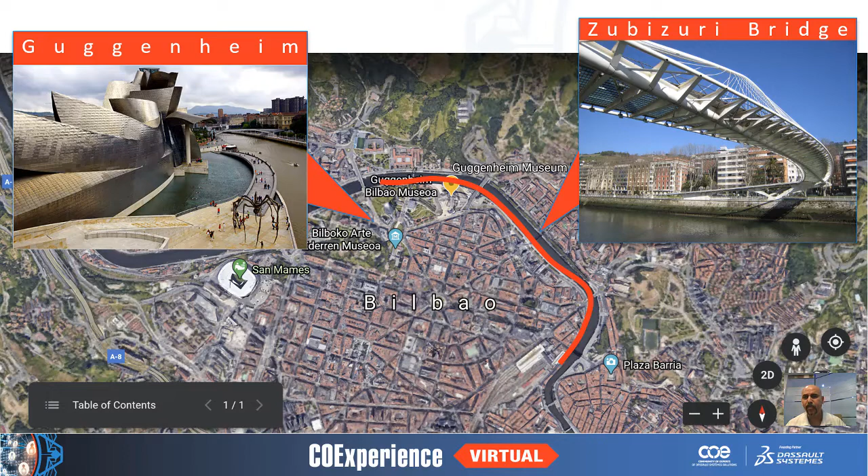This is our story. In 2000, I went on an architectural pilgrimage. Top of my list was to go see the Guggenheim in Bilbao, which was developed by Frank Gehry and it happened to be created on the CATIA V4 platform. When me and my friends got to Bilbao and exited the train, we were right next to the riverfront. So intuitively, we began to walk on the river, and along the way, we came across a pedestrian bridge, the Zubizuri Bridge. To put the story of collaboration in perspective, I would like to take you on a journey of the project.

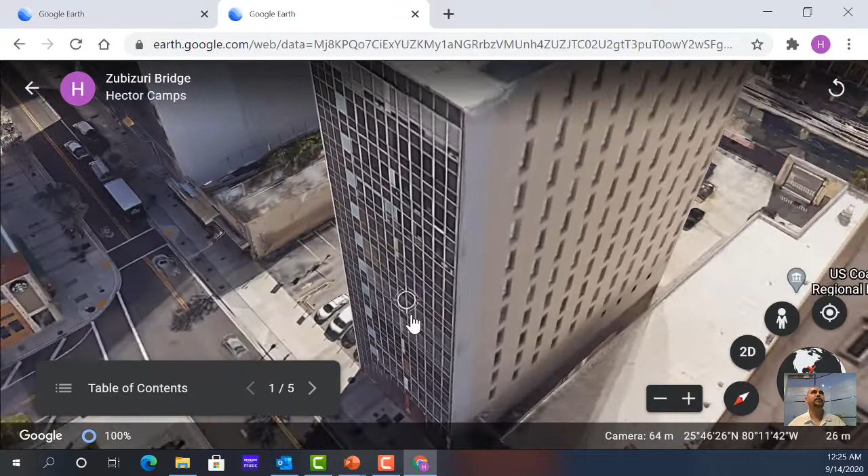So here we are in Miami, my hometown. This is Miami. This is where I live. Okay. And this is a beautiful part of Miami here. This is Key Biscayne, Brickell Key over here. This is the Brickell area. Here you're looking at downtown Miami. And if I just kind of pan around a little bit, this is where I am. This is the courthouse building, and IQ is located on the ninth floor of this building. Okay. So here in Miami, in this city, is where I began my part of this process.

Now let's go a little bit over. So from here, I am collaborating with my friend Mansu Kim, who lives in Seoul. And this urban density that you're seeing here, this is the city of Seoul. Somewhere in this city is Mansu Kim. I've actually never met Mansu Kim. I only know him virtually. He only knows me virtually. And together we coexist in this virtual world, and we have a common platform between us that's bringing us together.

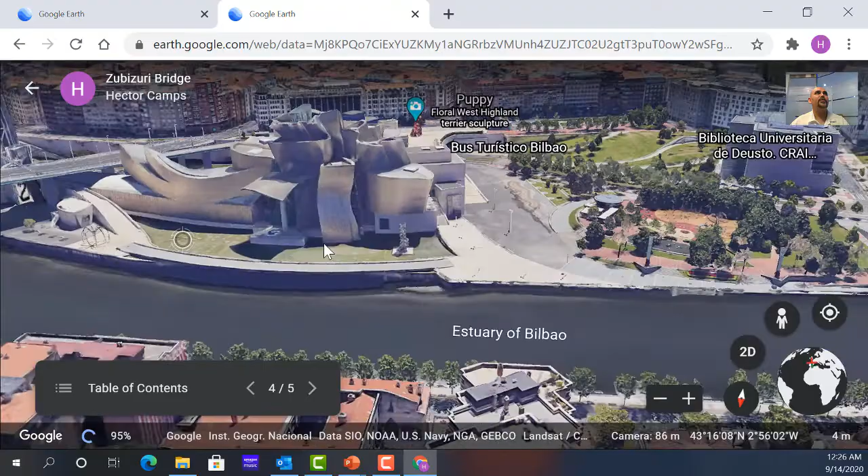Now, the project that we're working on collectively is in neither city, right? It actually happens to be in the city of Bilbao. Now remember, I actually went to Bilbao specifically because I was interested in going to see the Guggenheim. Okay, and here you can see the Guggenheim. I'm just gonna close that out here. I always say I think this is the building that changed the history of architecture and revolutionized the building industry forever in unimaginable ways, right? This project brought me from Miami all the way here to Bilbao to understand this project. Now, this is the reason why I was in Bilbao.

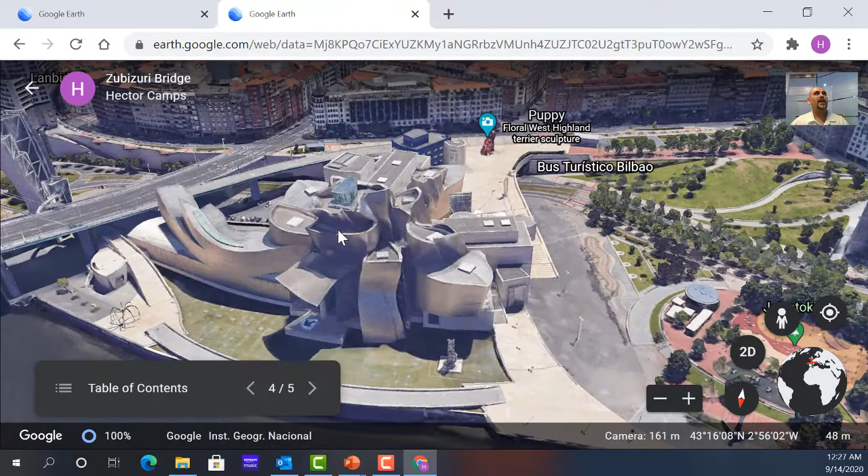But along the way, I was walking on the river, and here on the river is the Zubizuri Bridge. 20 years ago, and today is 2020, and I was there in 2000, so really it's been 20 years. This bridge inspired me, and today we've recreated it using CATIA. This is what I see. And I was really amazed by the elegance of this design. The cantilever that catches this parabolic arch, it's a beautiful, elegant work of architecture and engineering.

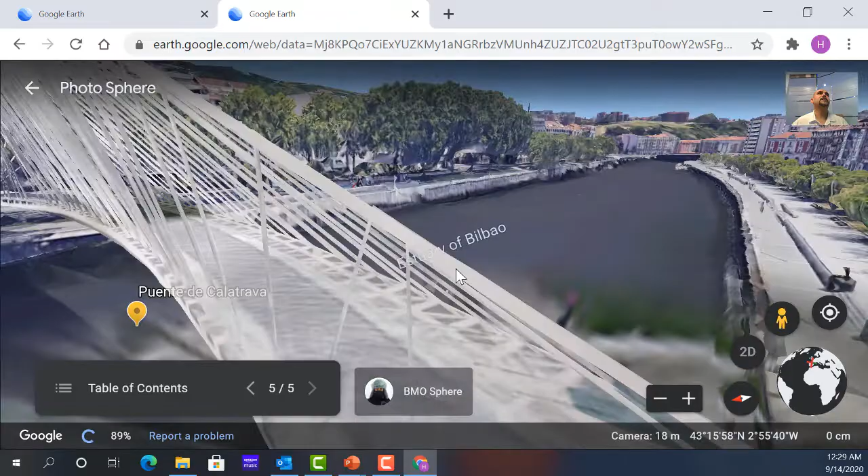Just put maybe one more perspective here. Since I can't afford to take everyone to Bilbao to go see this bridge, I can kind of show you this experience of what it looks like. And the Guggenheim is further down the street this way. You can kind of see parts, a little bit of it here. But this tension bridge was extremely inspiring to me when I was there.

Alright, so Santiago Calatrava is essentially a prolific engineer. Some of his noteworthy projects include the Milwaukee Art Museum, the Athens Olympic Stadium, the Turning Torso, and the World Trade Center station, which is also referred to as the PATH train station.

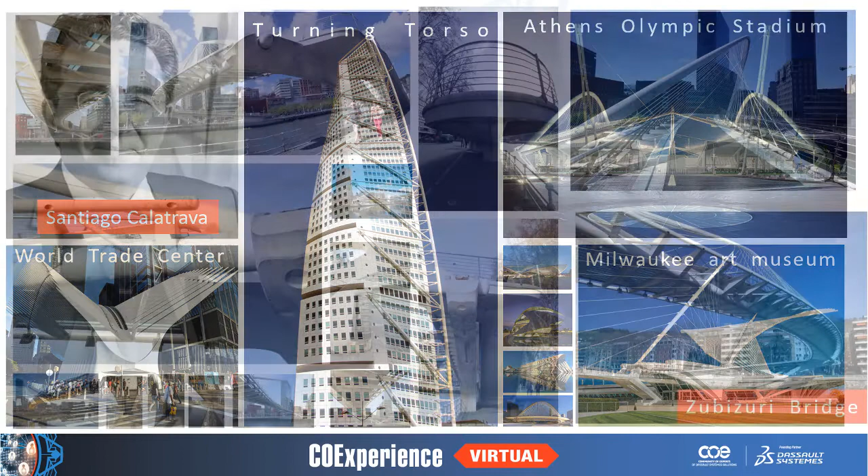Specifically, the project that we're talking about here, the Zubizuri Bridge, Mansu and I looked at thousands of images related to the Zubizuri Bridge in Bilbao. Here you can see a cross-sampling of those images that were instrumental in informing our understanding of the bridge. Through research, I was able to identify an elevation of the bridge. This elevation was instrumental in helping us understand the angle of the parabolic arch. Moreover, I was able to find a front elevation of the bridge showing the parabolic arch itself and its relationship to the river banks.

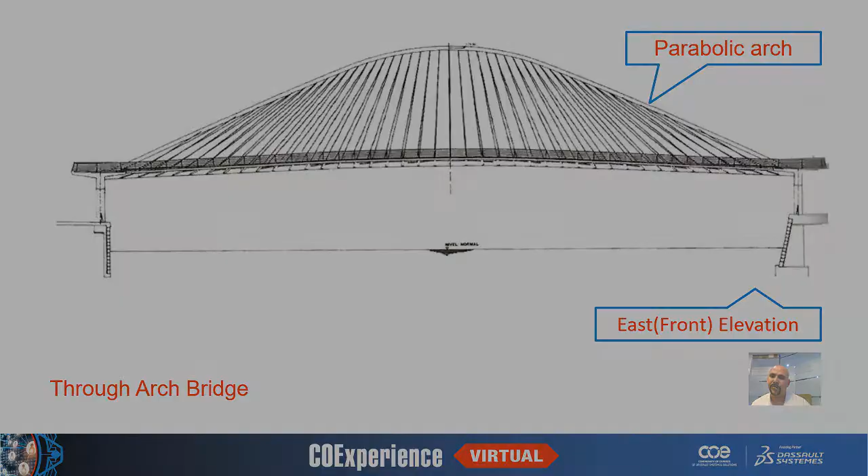So we asked the question, can we recreate the bridge in 3D in real time with a globally distributed team? Is the technology really here to do this today? So we began to collaborate. We implemented two solutions on the 3D Experience platform. First, we created a shared collaborative space. Second, we created a 3DSwYm community. I like to think of the 3DSwYm community as social media meeting project development.

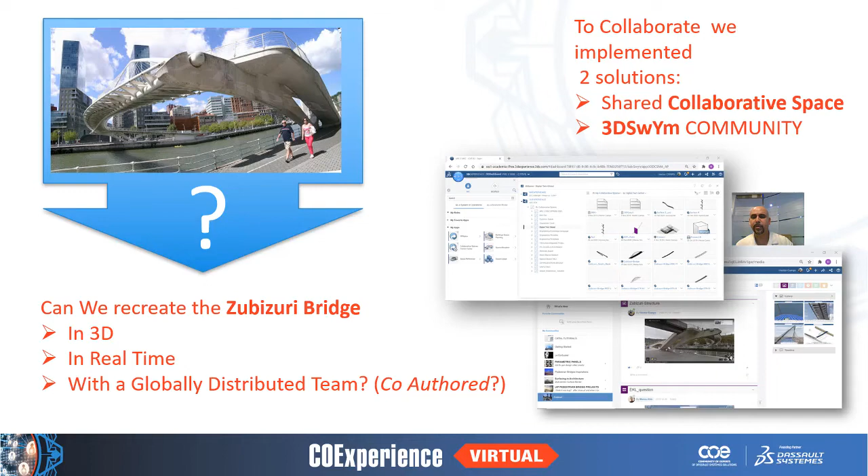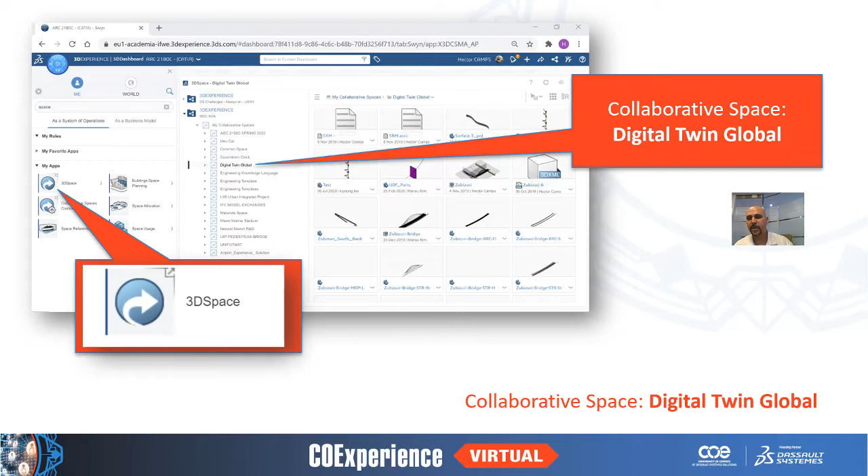In this image, you can see the icon for the collaborative space, 3D space, in the 3D Experience platform. On the right, you see a list of collaborative spaces. The Space Digital Twin Global was created to work with Mansu Kim. For this experiment of multinational collaboration, Mansu was invited to the space and was given digital rights of leader and was assigned all the appropriate licensing to author the model.

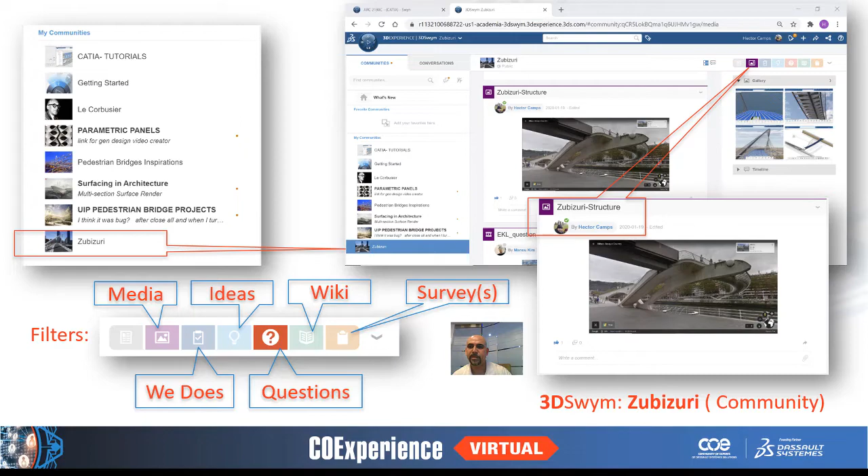Throughout the life cycle of the project, we used the 3DSwYm community Zubizuri to communicate back and forth with pictures, media, ideas, questions related to the project in an informal way. Let's open the 3D Experience platform and do a search for Zubizuri Bridge and use 6W tagging to filter. In this case, we're going to filter by user and we're going to filter by collaborative space.

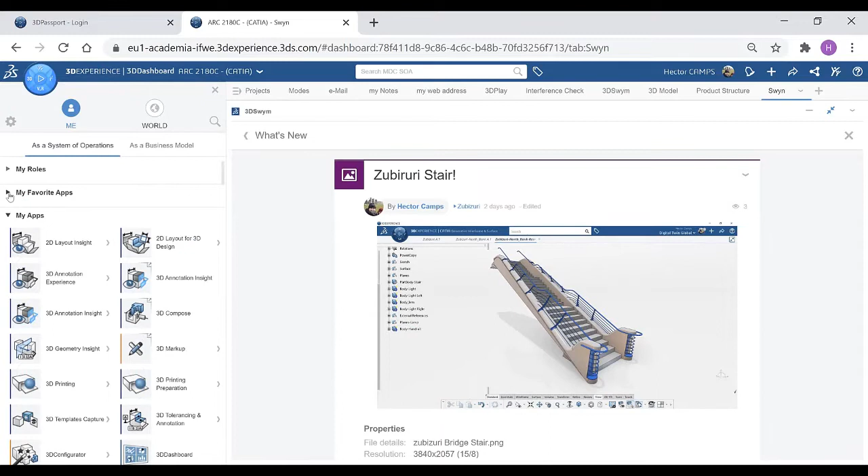So for example, if I go to Chrome, I'm going to find a platform I want to log in with my secret password. And there you have it. I'm logged into the platform. So this is the new updated version of the 3D Experience Platform 2021 or 2020. So if we come here to the compass, you're going to see the new expanded roles. I'm going to compress my roles. I'm going to close my apps, and I'm going to expand on my favorite app, which in this case is Building 3D Design, my app of choice that I'm going to open at this time.

Okay, now that it has opened, I'd like to point out that we're working in a collaborative space, Digital Twin Global. You can see that the one that I'm working with has a blue icon next to it, and that's effectively where all my multinational projects globally collaborating with Mansu Kim are being saved. This was a shared collaborative space that I created and invited Mansu Kim to be my co-author with me on.

Okay, so to begin the process, I'm going to run a search for the Zubizuri Bridge. I'll use a previous search, in this case ZUB, because I don't remember how to spell Zubizuri. So whatever I know, I'm going to put it in there. I think it's really critical to understand that you need to know where your information is and you need different strategies to help you find that information. So here if we look under the source, you're going to see that I have communities. I have Google Drive. I have multiple databases connected here. But the one I'm looking for is on collaborative spaces.

Specifically, we're looking at one collaborative space, which is the Digital Twin Global that I created for this multinational experiment. So I'm going to go ahead and select. I'm going to add Digital Twin as a filter, and you can see here at the top which filters are being applied and selected. You can see them listed here.

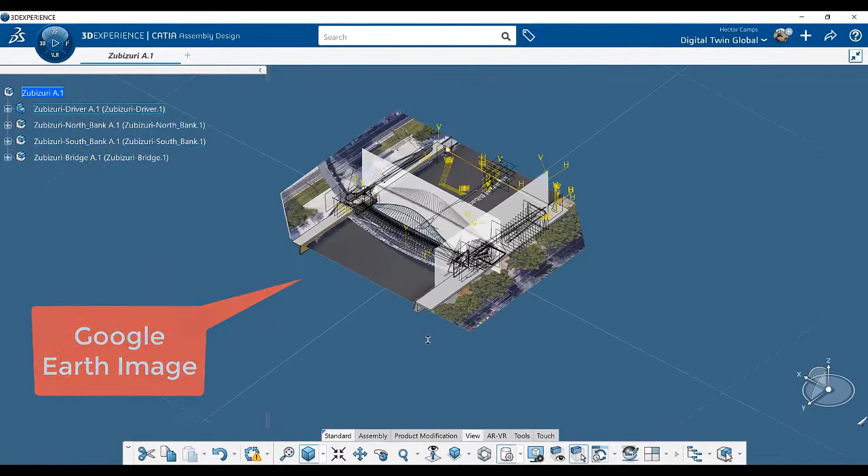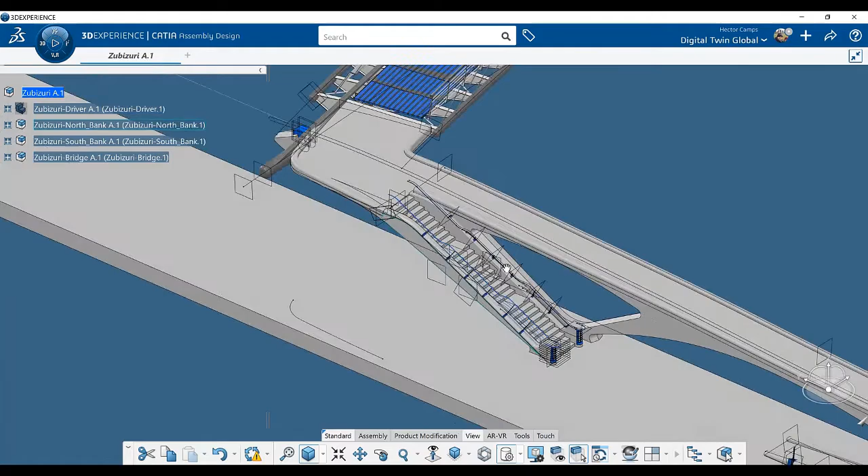And this is actually a model that we're seeing here. This is actually a live working model. Let me just hide this here. I'm still in the process of developing the project, but this is a work in progress. You can see the detailing here on the ramp and how we're developing the bridge and the connections to it.

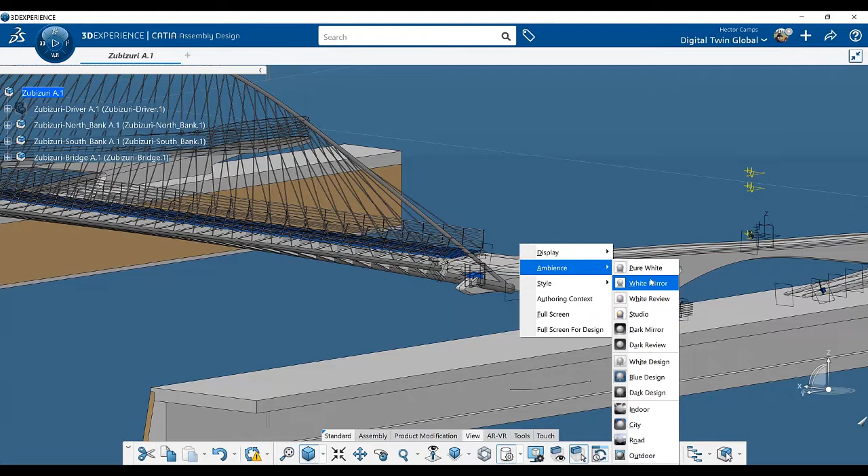And you can see the center section that was collectively created by myself and Mansu Kim working together multinationally to develop this. You can also change the environment, for example, with a pure white. Let's do a white mirror.

A little bit high, so it's not going to show, but you get a sense of where we're going with this. I always like to look at it in perspective. Let's say 35.

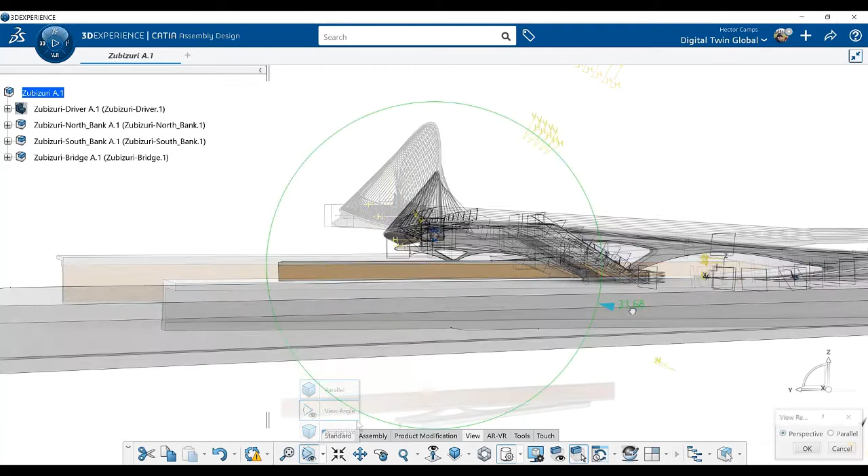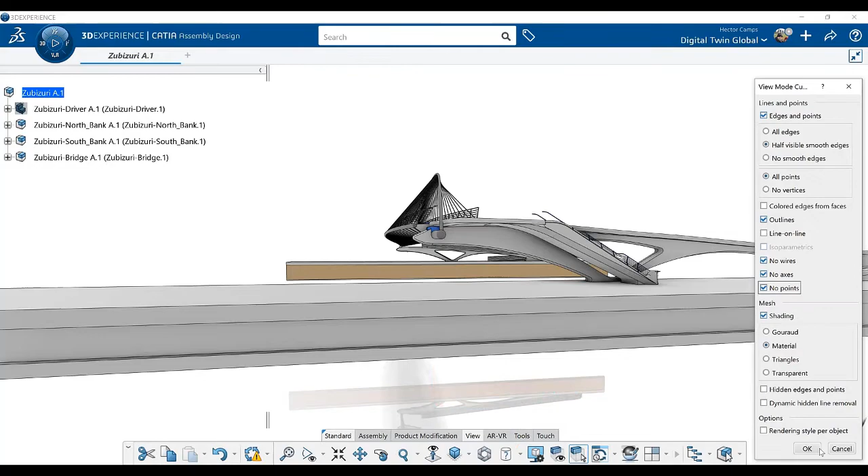If we go to under view, we can customize our settings. I'm going to get rid of wires, axes, and points. That gives me a cleaner view of the model. You can see how she's coming along.

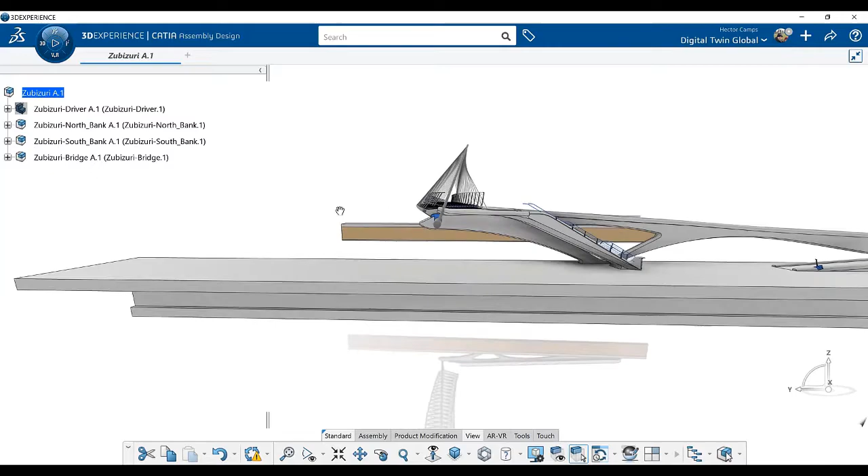This has been a beautiful study that I've been able to engage with my friend Mansu Kim to develop this project. Nothing helps you appreciate other people's work more than recreating the work of a master. So hats off to Calatrava. We love you, man. I think this is fantastic.

So more to come through the presentation.

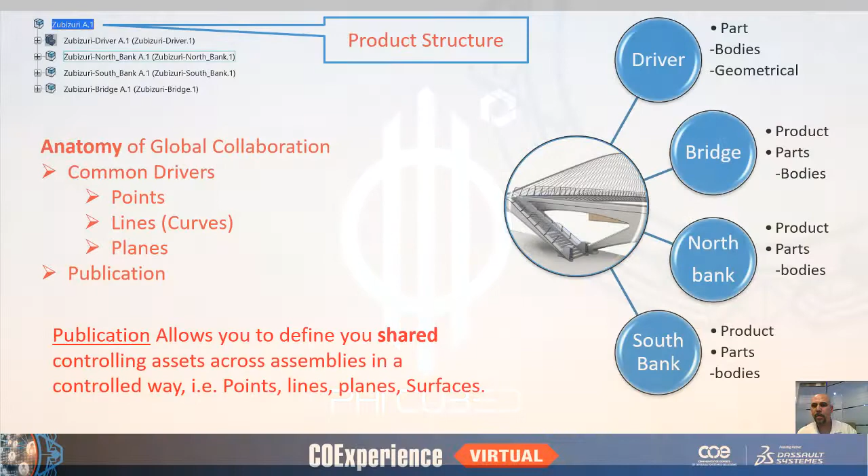I want to talk a little bit about the product structure for a moment. While it may not be obvious at first, the product structure plays a very big role in managing information and allows us to work at a very granular level. Don't think of the model as just one big model. Think of it as an assembly with sub-assemblies working together to make up the whole.

We developed the bridge as an assembly made up of three sub-assemblies: the bridge, the north bank, and the south bank. Another very important component of the model is a part that we use as a controlling mechanism called the driver. The driver part contains all the drivers that are common to the project, such as points, lines, and planes.

These reference elements are used to inform the geometry of the other subassemblies. The other subassemblies are linked to the shared assets, meaning if those shared assets were to change, those changes would be driven throughout the other subassemblies that depend on them.

Another interesting component of this collaboration workflow was our use of publication. Publication allows us to officially define what the common elements are that can be shared across the assemblies. This way, we can control what reference elements everyone is using throughout the project, and it's clear what the common drivers are. This is particularly important when working on a complex assembly.

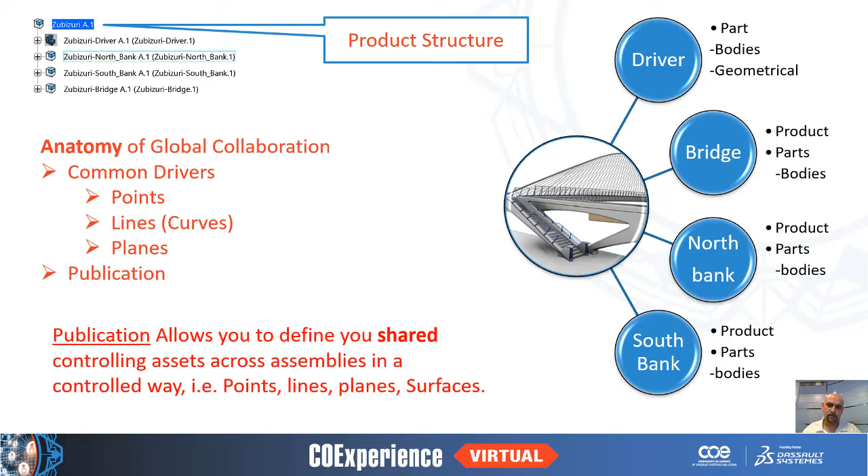Ownership. Ownership is one of the biggest topics that comes up for us when talking to clients about global collaboration and co-authoring of anything. This is where collaborative lifecycle management comes into play.

In short, the platform is keeping track of who owns what throughout the entire project development cycle. In a fragmented world, people duplicate information and effort all the time, mostly because they cannot leverage what has already been created by others. But with 3DEXPERIENCE, you can archive your model at any stage of development and transfer ownership rights to a new author.

That new author can then leverage your model for further development throughout the product development phase. The intellectual property of the model can shift back and forth with owners as the project progresses. You could say that the 3DEXPERIENCE platform eliminates the handoff and rework that is common in a fragmented product or project development process. And effectively, that's what we did.

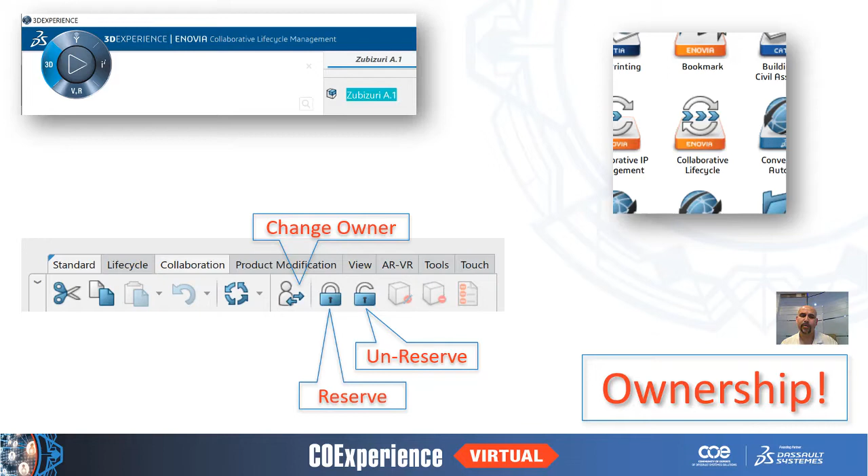I made up many of the drivers for the model and transferred ownership to Mansu. In this image, using the collaborative lifecycle function, you can see that the ownership rights for the design driver are owned by HCamps, which is me in this case.

If you have concerns that someone could change your design, you can lock the branch that you're working on, which will prevent anyone from making changes to your model. If someone did try to make a change to the model but didn't have the editing rights over those changes, it would basically not be saved to the database.

Okay, so I think this is really critical. It's one of the main concerns that people have when you talk about these collaborative ideas.

We will now look at the model. Before we start, I'd like for you to look at the products tree on the left.

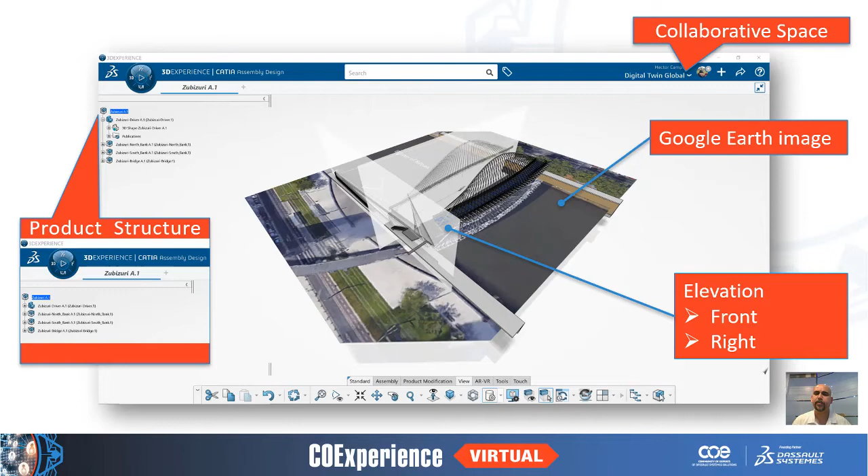Notice that I used the elevations I showed you earlier in the model, using a tool called Sketch Tracer to position them into the model. I also included an image from Google Earth. Please note that the Collaborative Space Digital Twin is also at the top in the upper right-hand corner of the modeling environment.

Mansu is going to take us through a presentation on automation using the EKL programming language and Knowledgeware.

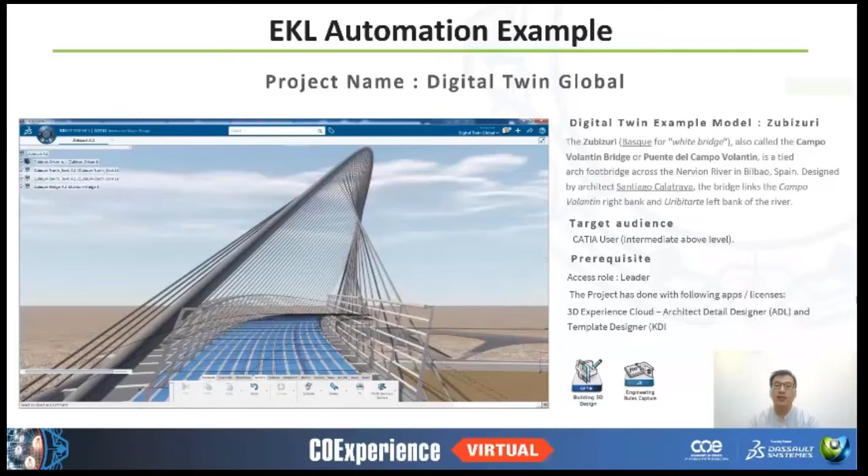Also, this example is a pedestrian bridge in Bilbao, Spain, called Zubizuri, designed by Santiago Calatrava. The agenda is as follows.

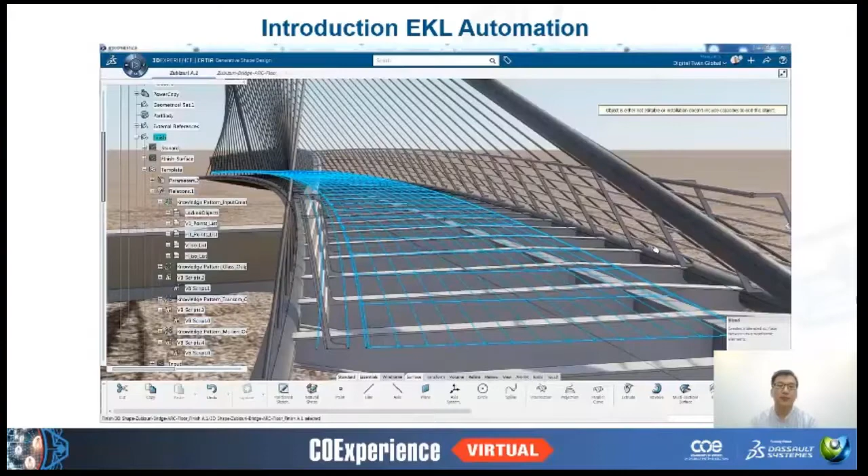Then, let me introduce EKL automation. First, we have prepared a modeling automation video that we built.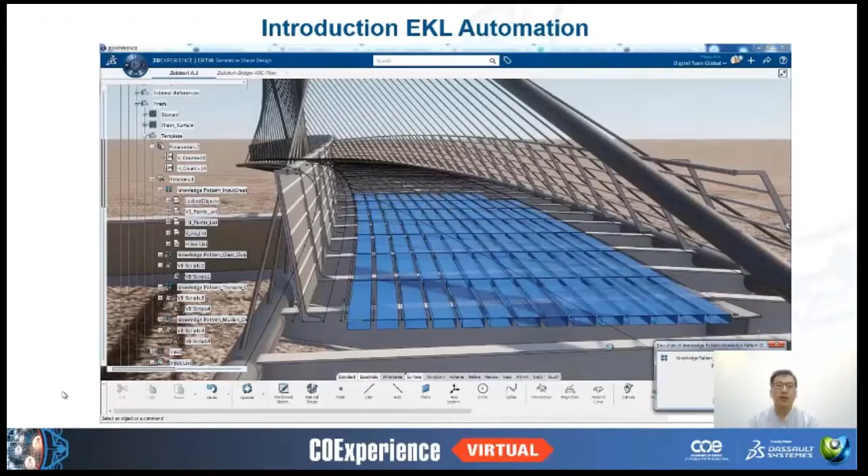After setting the number of a grid, you can see that the glass template is automatically created by learning the knowledge pattern. There are some objects like a mullion and transom that can be used in conjunction with the grid that was created this time, which can also be automated in a similar way to the template glass.

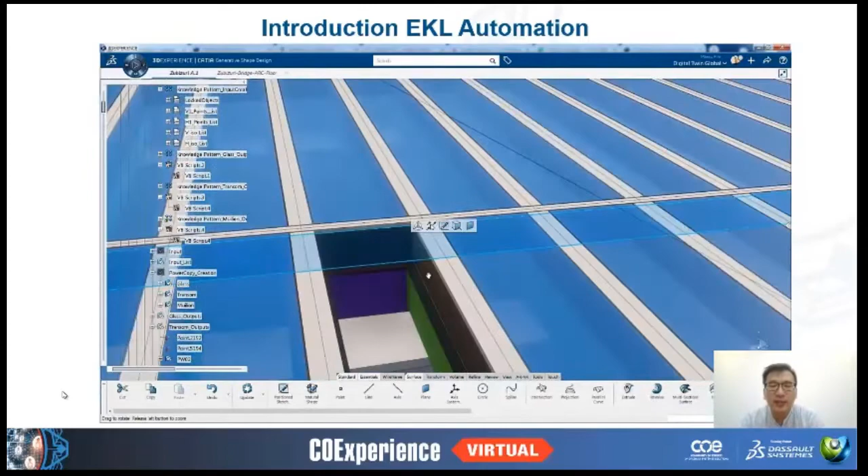In fact, almost every part of this bridge that you are looking at has been built using this method of automation, like safety rails, substructures, and wires at the top.

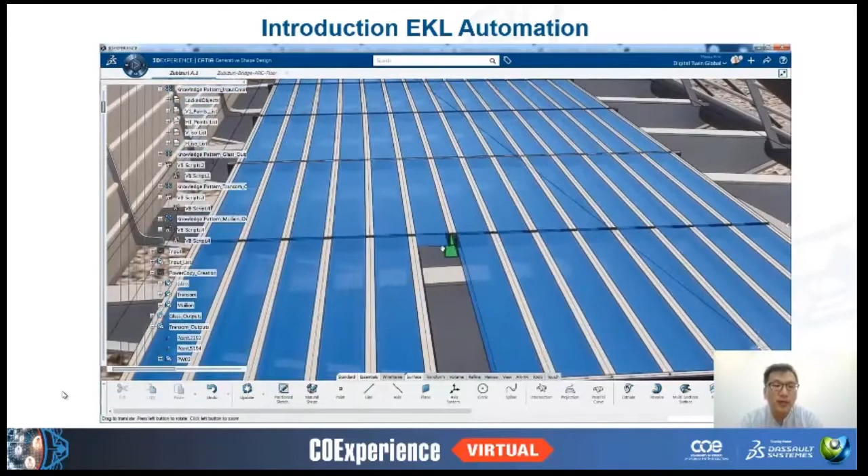When building a template, we consider the LOD level, which starts with rigid and simple shapes, so we can check the overall shape and gradually upgrade the LOD level. This is how grills and seat panel members are automatically created.

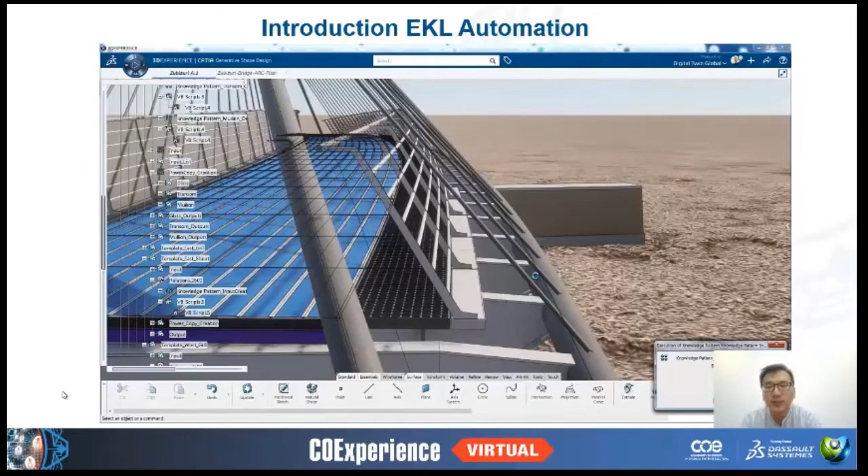As an advantage of creating automated modeling, we can always update and upgrade our template. For example, if you needed to change the section design of the safety rail, as you can see in this video, you can update only one template of the safety rail, and we are going to build the rest.

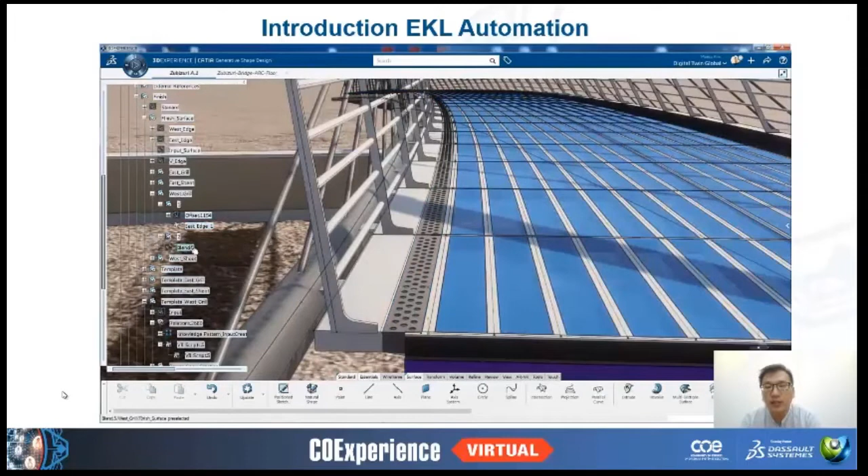Now, we are changing the size of the grid by modeling the grid.

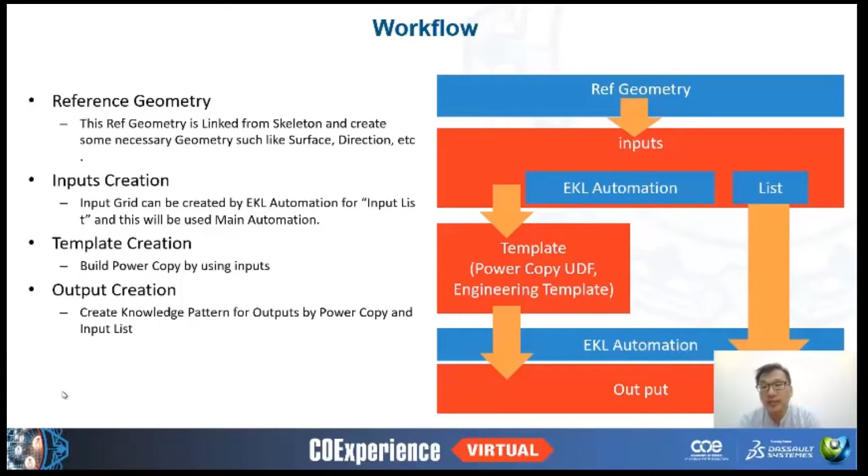Next, I will explain that it is divided into stages: reference geometry, input creation, template creation, and output creation. Let us look at each element.

First, we start by preparing a reference. We can refer to the geometry as defined in the other part file or the higher geometry set in this step.

That is, by linking mass modeling or geometry made in the skeleton sections, we can link them to the design of the previous stage.

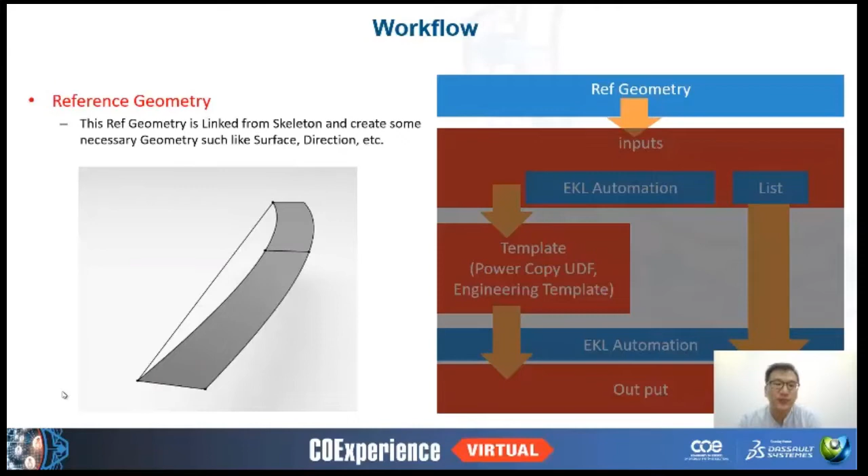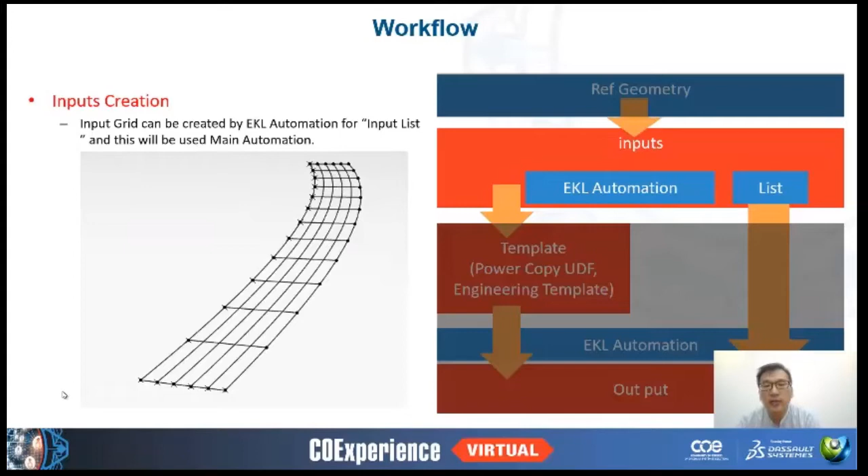This example of using the create or modify datum syntax is an example of a loop syntax. Declare the parameters you want to use first, and calculate the distance and the equal proportions value of the curve so that you can know the locations of each point. Finally, we complete the loop using a while syntax.

Points created in this way will be included in this specified list.

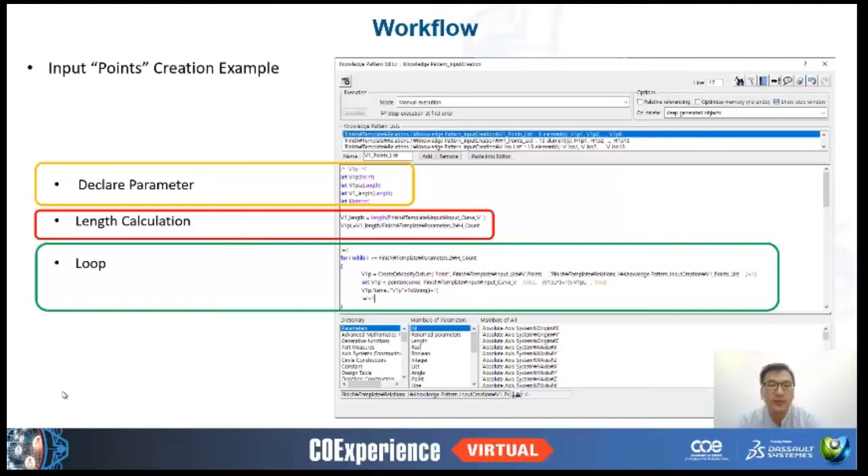You can also create an ISO curve in a similar way. You can use the same method to create V points, H points, V curves, and H curves.

Next is the template creation section. This is the step to create the result using pre-created input values. Because automation's modeling concept can be modeled repeatedly, you can initially make a simple, rough shape, and finally upgrade the detail.

For example, you can integrate with a template such as adding attributes, like 3D tag operations, or creating a grid view that can be linked to further drawings. We use Power Copy for this example.

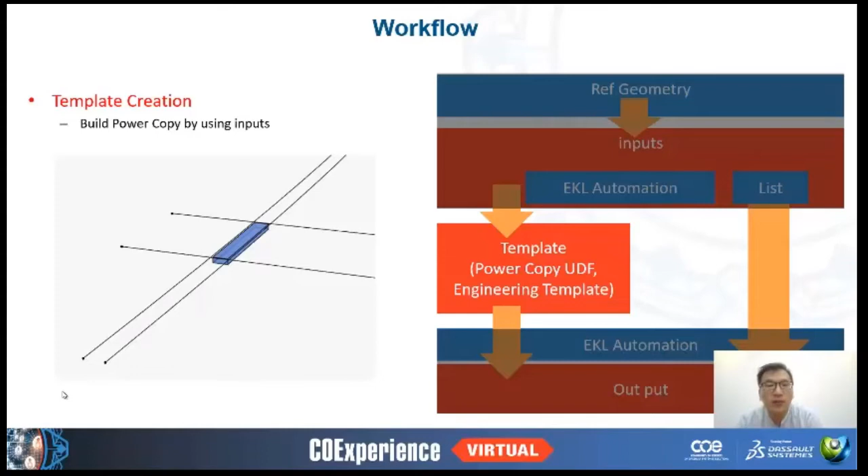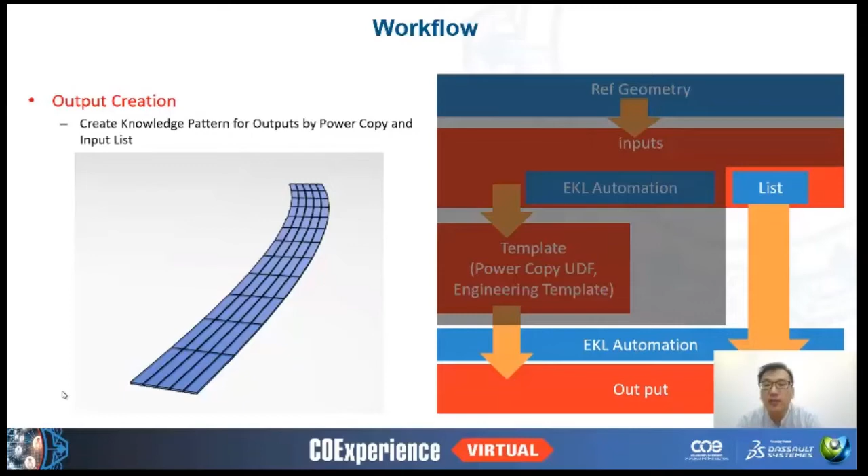Finally, this is the step to create an output using EKL automations. At this stage, the input values required by the template are replaced in the input list.

Let us take a quick look at EKL automations. Declare the parameters you want to use. It also uses 'while' syntax, which can create a phrase that responds to input curves.

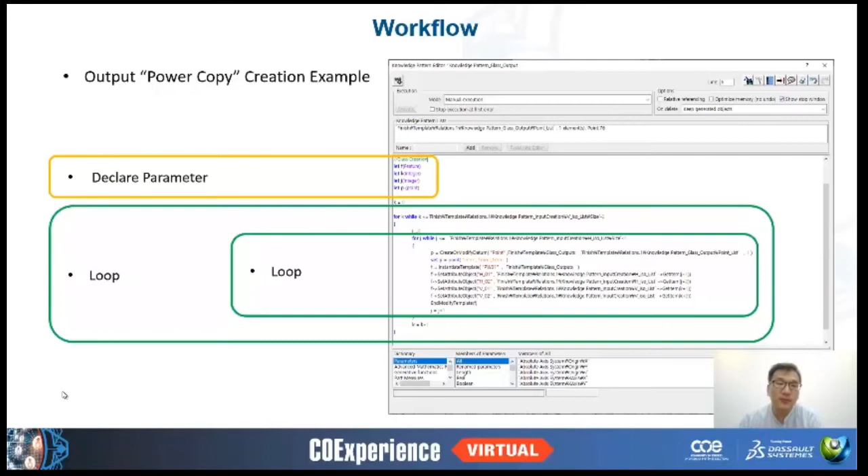Finally, when we had to create the geometry repeatedly due to design changes, we used a Visual Basic script to delete previously created objects. If you run this script on the first line of the knowledge pattern, the previous output object will be deleted whenever the knowledge pattern is executed.